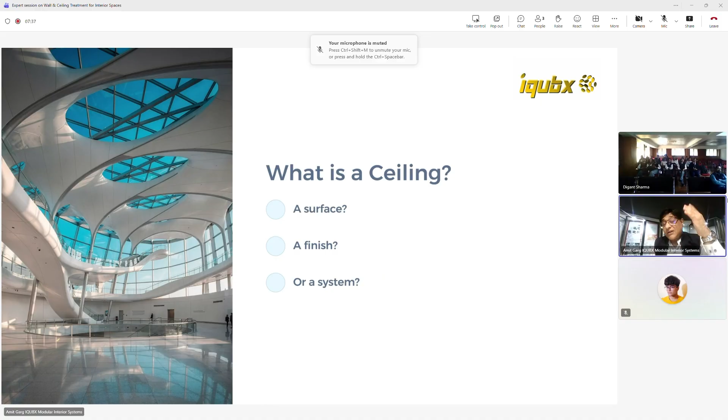Generally speaking, it is the soffit of a slab - the underside of a slab. So it is called the soffit of a slab. But in interior terms, it would be the secondary layer, which is suspended from the structural slab,

and performs different kinds of functions. And that is where interior designers become very important, because they have to really control and design that ceiling, which is in intimate touch with the space that is being occupied, right?

So as I was saying, ceiling is not decoration, it is infrastructure. You have a concrete slab, you have metal hangers. I would also like to encourage each one of you to really think out of the box, think in a different perspective.

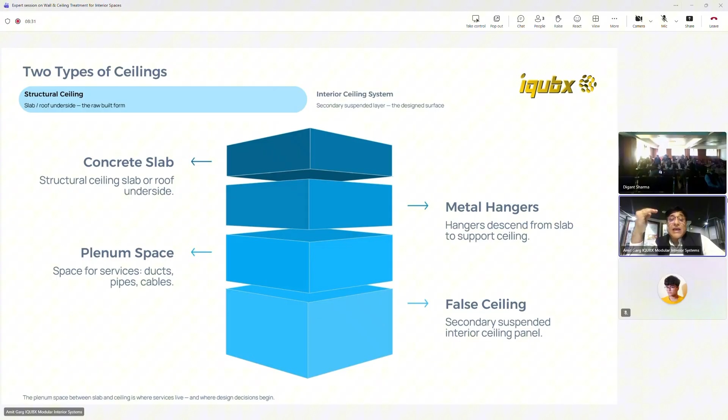You need a secondary surface hanging down from the main surface. So what would you do? You need hangers to suspend that. And then there is a plenum space, the space between the secondary surface, the false ceiling you've designed, and the concrete slab. There's a lot of services which go through that space. And then, of course, the false ceiling itself.

This is a bit dry, a bit of discourse, what we are talking about right now. But gradually it will become more interesting, as you will really find.

So why do we need a ceiling? The ceiling is there for space making, so that you can design and define a space. And then there's a performance aspect to it. Performance can be psychological, physiological, acoustic, thermal, fire performance, and other aspects, because in interior spaces, all the elements have a performance element attached to them.

It is defining and affecting your psychology, your perception, and it is service integration. Whatever services are going through, the ceiling has to interface with those services so they can become effective. And of course, maintenance - once the services exist in the plenum space, you need maintenance for that. Most people don't think about designing access to those services while designing a ceiling. Though you are students, you should become aware of this from day one, because that will define the kind of output you deliver as professionals.

The first thing I was talking about is visual dominance, the psychological layer. In most interior perspectives, the ceiling commands a visual real estate - when you look at a room, you're not even aware, but the ceiling, along with the floor, occupies a major part of the visual field, almost 30 to 40%. The walls, in comparison, are much lower. But as interior designers, we mostly focus on elements inside a room - partitions, walls, a bit of flooring - but we don't talk about the ceiling too much. That is the kind of focus I want to bring about in my talk today.

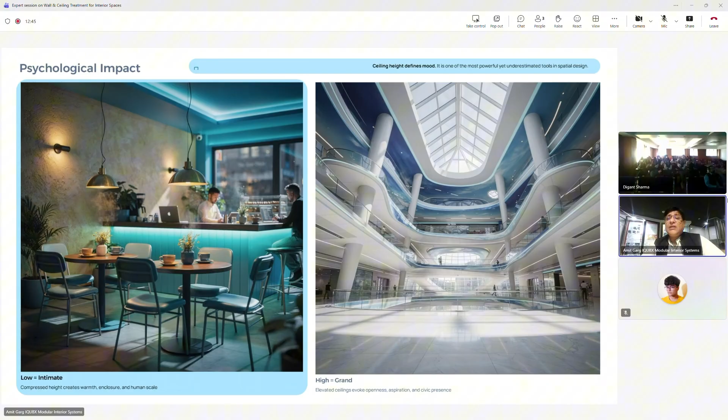For example, in this case, you can see that the image on the left has got a lower, or let us say a normal ceiling level, but on the right, as you will see in atriums of many malls and institutional buildings, in the entrance areas, a very lot of height is there. And that means grand, that means institutional, that means authority.

But it is definitely not intimate, because it is meant to intimidate or scale down the human presence, and says the space is big, the institution is big, the organization to which the space belongs is big. Or if you're talking about public spaces, it means you need to tone down the ego of the occupants, to say, look, you are an occupant of this space and you are not the master of this space.

While on the left, you will see it is more intimate. So people come here to enjoy, they have some intimate conversations, or they want to relax, which if you are sitting in the right space, I'm sure that is not going to happen. You are going to be awestruck. You are going to have a different kind of experience altogether. Not that you can't have a coffee sitting there.

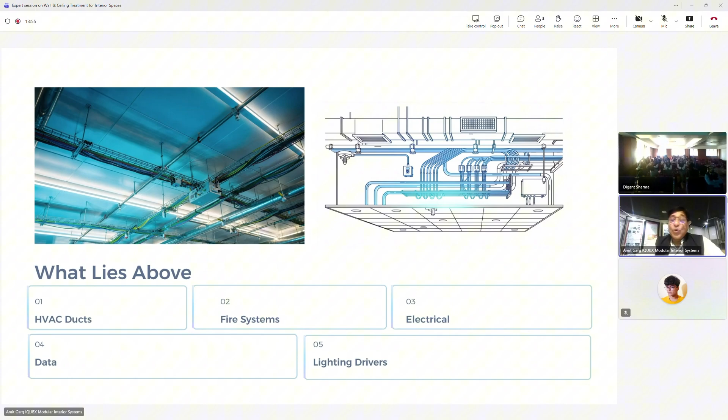And then there is the performance layer. So we were talking about services which go above the ceiling. Some of the things are written here already. But if someone would like to come over and say, what are the kind of services which go above the ceiling in the illustration, you can see some names are written there. Would you like to share something?

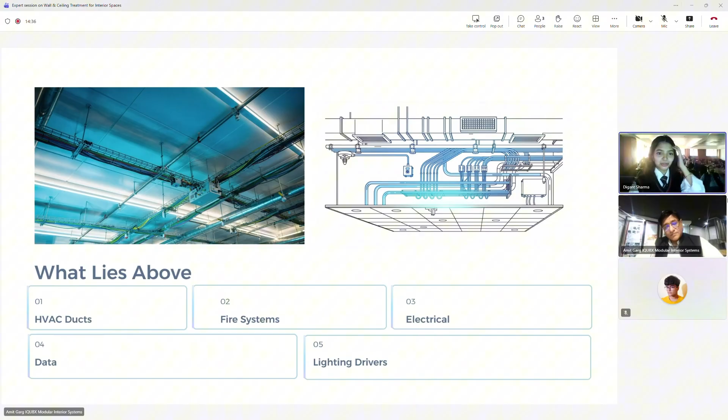So they can be electrical services, then AC, the air circulation ducts, and I can remember these two. So there are AC ducts, then there are AC machines themselves. Then there are a lot of sprinkler systems, firefighting systems, smoke detectors, firefighting systems with different kinds of pipes which will have valves that need control.

Above ceiling fire detection, smoke detectors will need access because they need to be reset. For the AC ducting, they may need some maintenance or repair. But of course, no one gives access to the AC ducts as such. If something happens to that, you have to break down the ceiling or dismantle it somehow. But the AC machines which need regular maintenance, you need access for that.

And the electrical of different types - there may be high voltage cable trays, or circuit wiring, or low voltage systems related to data and telephone, etc. And of course, the lighting wiring and the lighting drivers. You may be saying, what is a lighting driver? But you may know, or you may be on a higher semester, that modern day lighting requires LED lighting, which are low voltage systems needing drivers - electronic circuits to control the flow of electric current. And of course, plumbing.

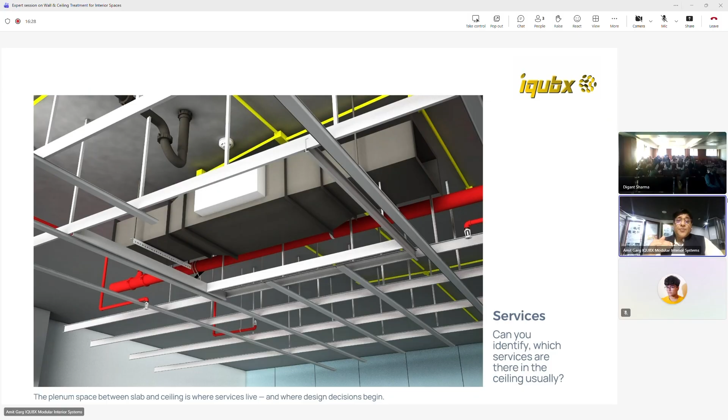So you see the plumbing pipe which is hanging down here. In many modern buildings, you will see the plumbing of the upper floor is hanging down, so there is no drop slab. Earlier, or in residential and many commercial buildings too, architects have different design sensibilities in what they really want to do. They may want to put the slab at a different level and hide the plumbing in that layer, but accessibility becomes a problem, and maintenance becomes a problem.

So plumbing is now hanging down in the floor below, and there you will need access if some maintenance is required, you can easily do that. And so many people are doing that.

So there are a lot of services going inside this ceiling, and of course it will be chaotic, because if you are exposing them, you need to lay them out beautifully. You have to color code them, you have to make them look aesthetic, which is a difficult and expensive thing. So many people say, why spend the money, let us not have a ceiling here. And I tell them, look, it is going to cost you double, and not many teams are efficient enough or good enough to create beautiful exposed, open ceilings. So ceilings do hide all these chaotic services which are going inside.

So when you look at the ceiling, you have to understand that the services are there. You need to access them, and it needs to be coordinated. It is written.

When you practice as interior designers and architects, you will realize that a lot of effort goes into coordinating the services. You will have consultants - an MEP consultant who's handling multiple things, or maybe the HVAC consultant is separate, the electrical consultant is separate, the plumbing consultant is a separate consultant, and then you will have a low voltage person, a lighting consultant.

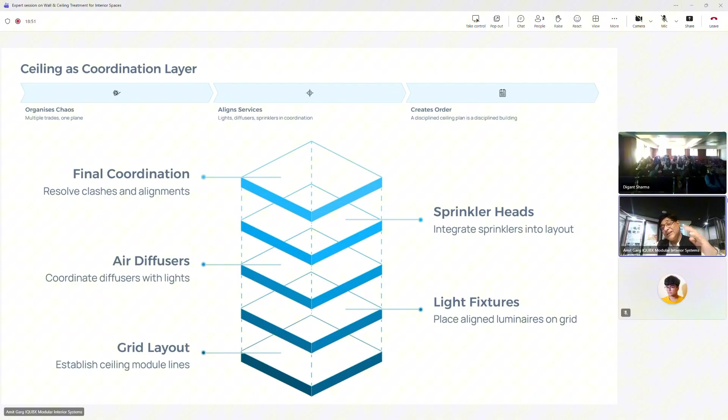So you need to coordinate all that, and you have to really understand how to ultimately design ceilings which are able to accommodate those services.

And as I was talking about, and I have been mentioning about the access - when you have so many services going inside the ceiling, you need access to it. If you cannot maintain it, you did not design it. So once you have the services, how do you access them? That is through ceiling trapdoors or ceiling access systems.

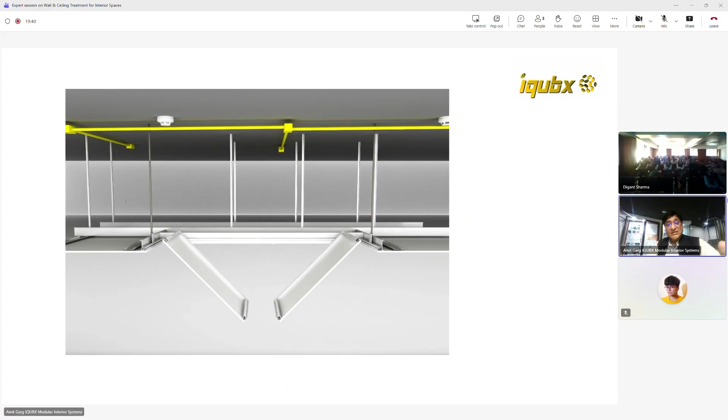Believe me, most of the services, most of the institutes, they are not teaching about this. Even if you go and practice outside with designers in offices, you will realize this is something that usually people do not talk about, or are not aware of, or do not have the expertise in. But you see, you could see how these trapdoors are there, and the doors can open, and you can access the services inside. That is one of the ways to handle access without breaking or dismantling the ceiling.

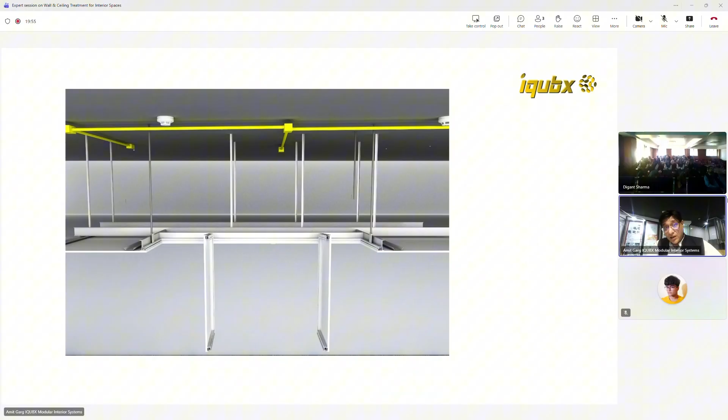And you will be surprised how often internationally people are not really addressing this issue, which we at IQUBX, and as a designer, I have handled. But we'll talk more about that later.

So we have been talking about, generally speaking, what the ceiling is - that it's an infrastructure system and not just an aesthetic element, and that there are a lot of services involved here. And of course, it is a performance layer, which we'll be talking about - because we are talking about acoustics here, thermal comfort, fire safety, air movement, and all that needs to be handled. Let us see if that slide comes up later. But otherwise, just be aware that this is a very important aspect.

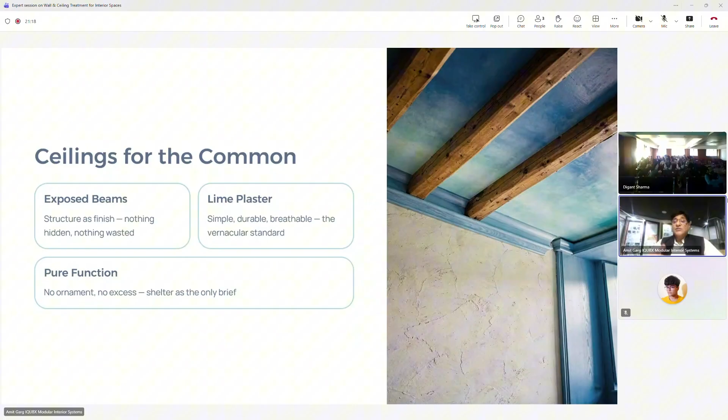So historically, let us go back in time - generally, society was divided into parts, the poor and the rich. I'm using a maybe politically incorrect, but simple segmentation of society. Ceilings for common people were like something like this - typically, across cultures, you have exposed beams, some lime plaster, and it's purely functional. Rather than functional, I would say it is structural, because there are no performance parameters, no services going inside, and no high aesthetic value needed.

It is not much of a statement which you want to make. The life was much simpler, politically and economically. What kind of statement would a common person like to make today? If you go to even a middle class ceiling that you're going to design in an interior, there's a statement attached to it - who that person is, what is the background, where is he coming from, what is his culture, where has he been in his life, has he been traveling - and the ceiling design can reflect that.

But in ancient ages, not much of that statement was there, and there was no desire to express oneself to that extent. But yes, it was different altogether when you're talking about powerful people, the rich people, or the religious institutions like the church, the temple, or the kings, or the nobility. There you saw different kinds of ceilings like coffers, domes, and a lot of murals which went onto the ceiling, with paintings and ornamentation.

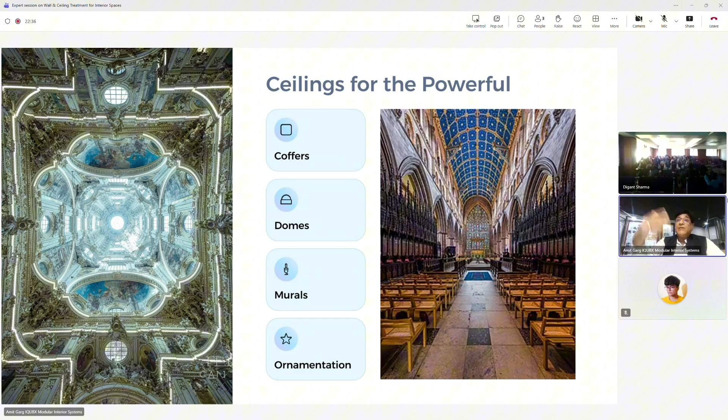The ceiling was power, it was identity, it was political. Ceilings told stories. There was a lot of emotion, and they began using the panels of the canvas to tell people about what needs to be said.

So if you see, there are a lot of sculptures in the temples, even on the ceilings, a lot of patterns which were tantras, which were yantras, which were religious patterns or cosmic patterns, or maybe paintings talking about that. In the Western culture, it was more of painting and less of sculpture, but in Indian culture, more prominence of sculptures was there and a bit less painting.

They talked about the stories associated with their religion, or whatever they wanted to convey. If it's a palace, you want to talk about the religious aspect, you need a sanctity to be a king, or you may want to talk about the campaigns you have won, you want to talk about power, whatever it is. So you see, ceilings told stories.

But then the industrial revolution came, and there was a lot of shifting, and a lot of services happened which were not there earlier altogether. We have talked about all of those services which went eventually from below the ceiling and from the walls and from the floor into the ceiling.

And what was the shift here? There was a different kind of ceiling system which happened, like gypsum ceilings and modular systems of different kinds, which allowed faster installation and allowed services to go through. But then there was a subtle shift which was happening.

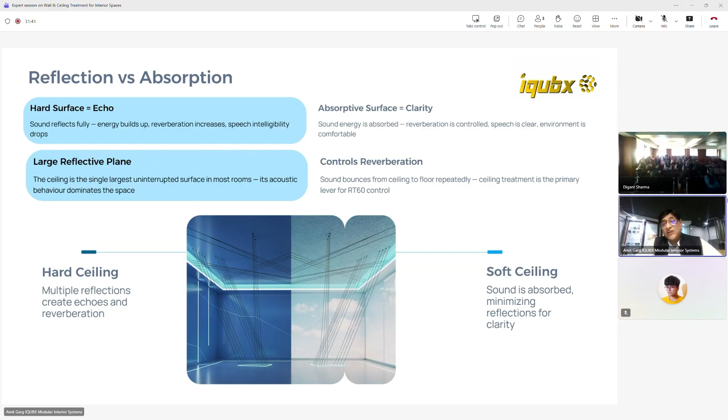Hard surfaces reflect sound, you can see it in the graphic a little bit, and absorb. When you absorb the sound, the echo, the noise, the sound is not reflected, and that controls the reverberation.

So hard ceilings are there, the soft ceilings are there. You have to be aware what kind of materials they are. You should understand a term in context of ceilings.

There's a term called NRC, and you should become very conversant with this term, because for any material that you use, the first question you should ask is, what is the NRC? How much sound is it reflecting? If NRC is 0, that means it is reflecting 100% of the sound. And if NRC is 1, it means perfect absorption, no sound is being reflected at all.

You need to balance it out, you need to balance it out. You don't want 0, you don't want 1, usually you don't want 1. Though you may sometimes want nearer to 1.

So mineral fiber tiles give you an NRC of 0.55 to 0.9, which is fair enough. PET boards or acoustic boards are made up of polyester or something, and they are again nearing 0.7, 0.8, 0.9. And gypsum board, as you can see, is 0.05 to 0.1, which is lower, meaning they are more hard.

So mineral fiber tiles is something you should go in for. There are a lot of other materials available, but mineral tiles have high sound absorption, they are cheaper, there are readily available systems. You go to a shop, pick it up, install it very easily, and they're cheap. That's why in many places you will see simple mineral tiles, maybe even in your own classrooms.

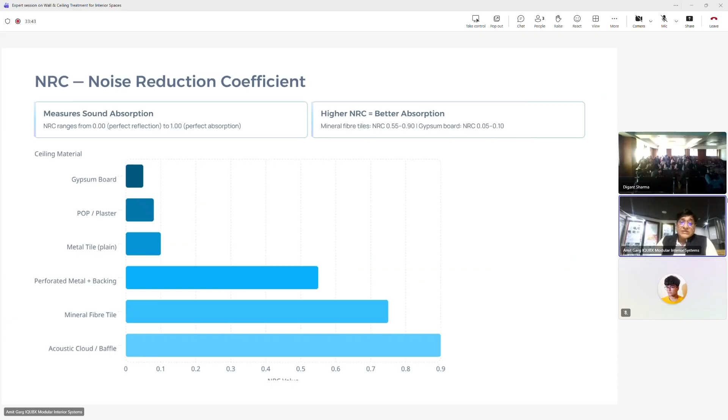You can see the graph below, which shows various kinds of materials like metal tiles, even POP, plaster, acoustic cloud. But you should be able to understand where you need to put which material and for what purpose.

One important thing no one is going to talk to you about, not in institutions, not in big architectural offices either, is above ceiling partition. If you put a complete wall or partition, the possibility of sound going from one room to another is very limited. But if it's not there, sound leakages happen, so whatever partitions or ceilings you put, the sound leakages will be there. You need to put up a plenum barrier or above ceiling partition so that the sound doesn't go above the ceiling, and that becomes a very important part of the ceiling design.

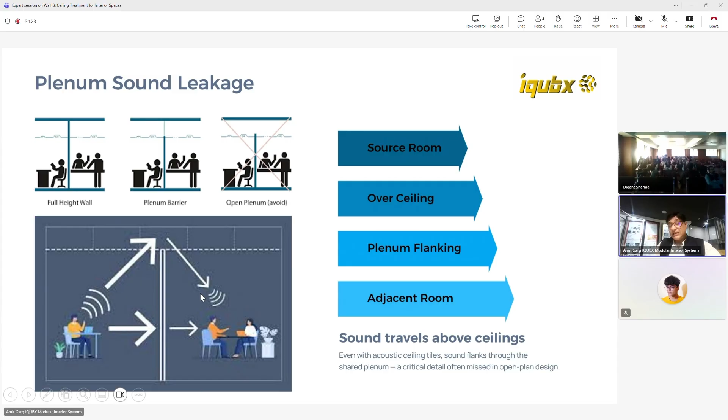Most of the big architects forget to do that, they don't plan it out properly. For HVAC, for high-end systems where maybe there's ductable kind of HVAC environments, you need to plan out how to isolate the air and how to isolate the sound.

That's again another chapter which needs to be discussed. But above ceiling partitions and above ceiling ventilation, cross ventilation ducts which absorb the sound while allowing the air to go through, because of sound absorbent internal surfaces, is something you should be aware of.

And now we come to the various kinds of ceiling systems.

You can start off with POP ceiling systems. How many of you understand what POP is? I think most of the people will have come across POP ceilings or gypsum ceilings because they are the most prevalent, common systems which are there in the market.

So in a POP ceiling, you have some hangers, you have a subframe, and then you put a jal, a wire mesh, a chicken wire mesh, and on that you apply the POP material mixed with water like a putty, and then you put some layers over that, and you can easily shape it.

So the beauty of this ceiling is it is very prevalent, so the labor is easily available. It is craft heavy, meaning you can create designs and patterns, and most of the available labor can do that. It is pretty long lasting; if you do it properly, you usually do not have cracks in it.

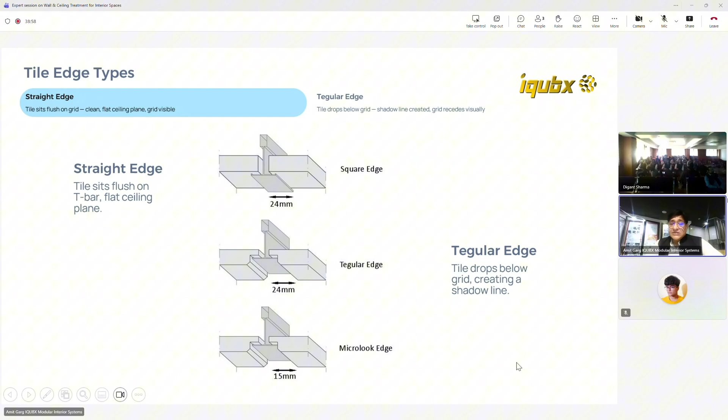Then you have a tegular edge, when the edges are chamfered, or a rebate is there, so the tegular edge can hang down and create much better aesthetics. When this gap here becomes small, it is called a Microlook, and this is terminology you will come across commercially a lot.

This applies to mineral tiles as well as gypsum tiles. In mineral tiles, as I said, the NRC is very high, and it's very easy to remove the tile — you can just remove any tile and access the services above.

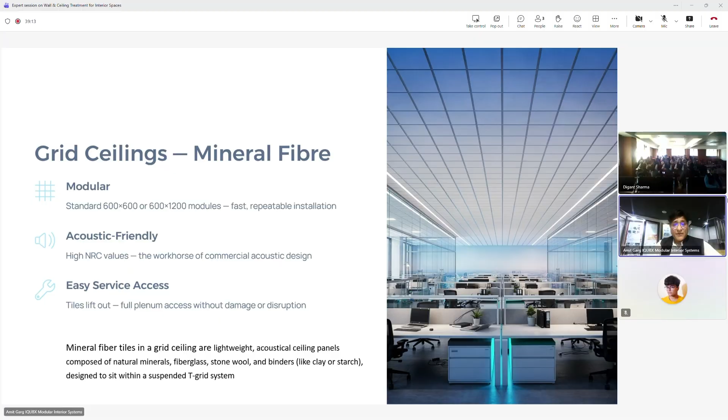So again, it is one of the most prevalent systems out there. Instead of mineral tiles, many people have started using gypsum tiles, which are reinforced gypsum tiles, much stronger and sturdier, and they can be perforated. But because of the hard surface, it will have high reflection and low NRC value, though it can have perforations. Perforation is one of the ways to control sound, because when perforation is there, what will happen?

So the sound waves will get absorbed, in the sense that they will go through these holes, get absorbed a little because of the porous surface, and then go above the ceiling. And so below you will have some sound insulation, some echo control, which is getting possible.

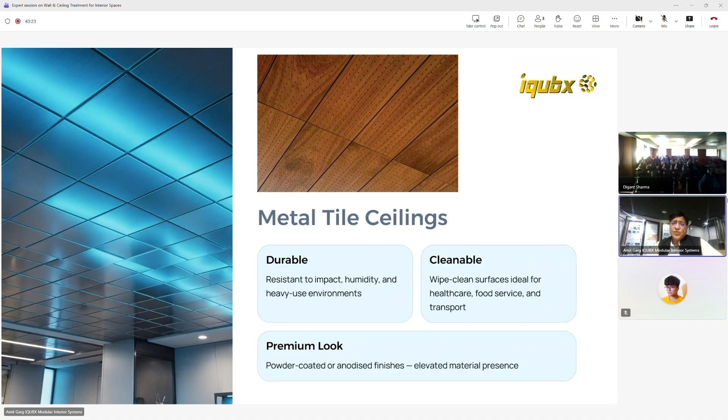Similarly, there are metal tiles which are again put in a similar kind of grid system, but as you can see, there are some perforations here. So various finishes are possible. I deliberately put a wooden finish tile here to make you understand that these days powder coating can easily be done on metal surfaces also, to emulate different finishes like wood. It's very easy to clean and maintain, durable, medium costing, easy to install, and has a very premium look. This is the kind of ceiling which many people have been doing.

So I was talking about perforations. In this perforation, this is another kind of perforation ceiling.

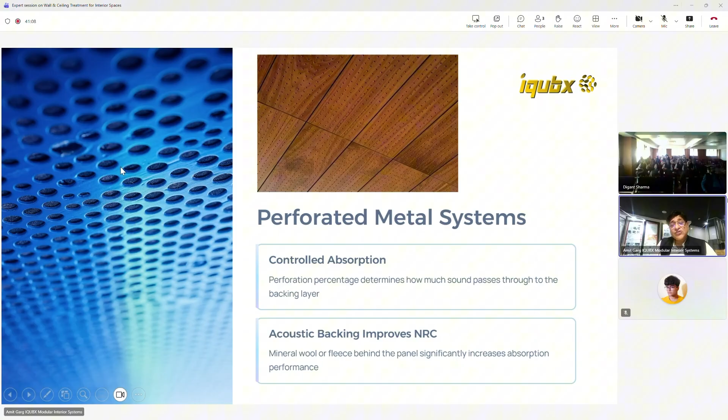And as you can see, there is a back layer here, and this back layer is the absorbent layer. So in this kind of thing, see, the perforation in the gypsum ceiling, the reinforced gypsum tile, was different, and this is a different perforation. This is just a hole. It is not going to absorb anything, and it is also going to substantially allow the sound which went above the ceiling to come back through also, because there is no depth. It is just 1 mm kind of thickness of these things, because once you start doing that, this will become a part of the specifications.

Many times, low-cost materials will have perforations, and they won't have an absorbent layer behind it.

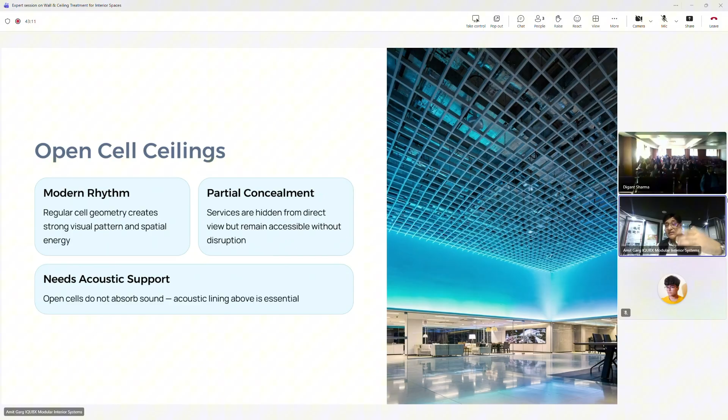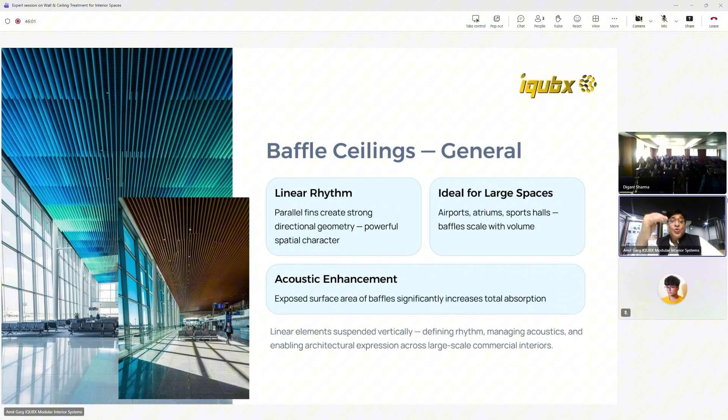But besides a lot of aesthetic value, these can have acoustic value. Usually they are made of GI and aluminum, which has zero NRC. But because it can allow some sound to pass through and capture a little bit that hits the ceiling, or you can put some absorbent surface touching the soffit of the slab, you can have some acoustic value here. Or you can make the baffle ceiling out of acoustic material itself.

So these were the basic ceiling types. Now, as I have been talking about, one aspect I would like to say is ceilings are usually static. Ceilings do not change. People design them once, and it stays the same, maybe with a little color change. Why is that? I like to say change is the only constant, and we are changing too fast.

In the time of artificial intelligence, the world is actually changing overnight.

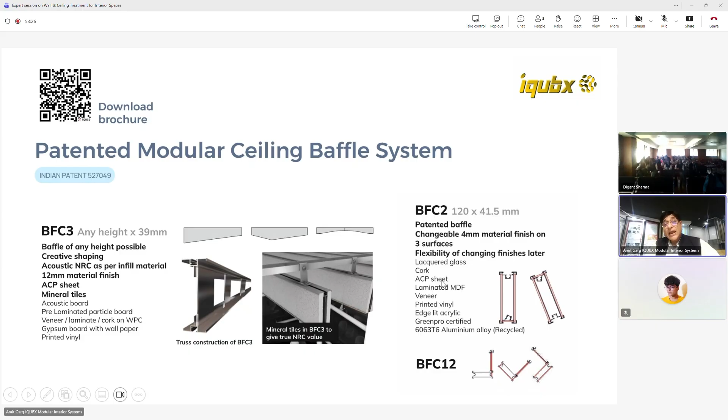On the right side is a patented system in which you can insert any 4mm material into this box section all around, including lighting, cork, lacquered glass, and veneer. This kind of system is patented; no one in the world is doing that, and it can be very liberating for designers. They can design different kinds of systems.

These are the different kinds of materials which can be embedded. People have used fabric, printed vinyl, and these are changeable finishes. They are inserted and you can change them, which makes them dynamic ceilings that can be changed and reconfigured later also.

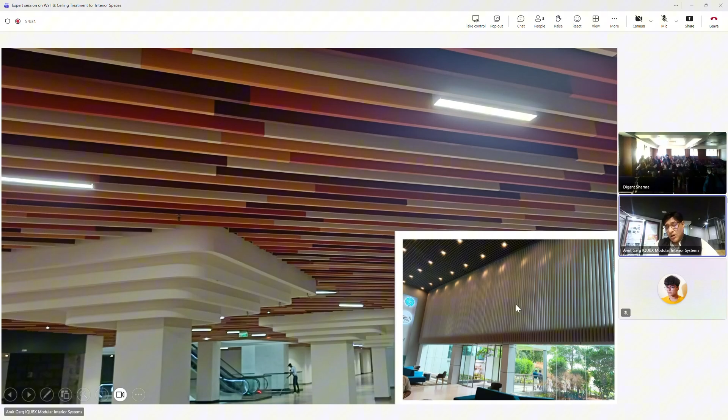I was talking about how designers use different shades of blue in the same space, and this is in Sector 18, Noida, Delhi NCR, at a mall called Wave One Mall. The entire third floor area, which is a food court, has used our baffle ceiling system in multicolor, and below you can see the baffles used vertically. This is for a pharmaceutical company near Hyderabad, and this is Tech Mahindra and Mahindra University in Hyderabad, which again used our baffle system with alternating colors.

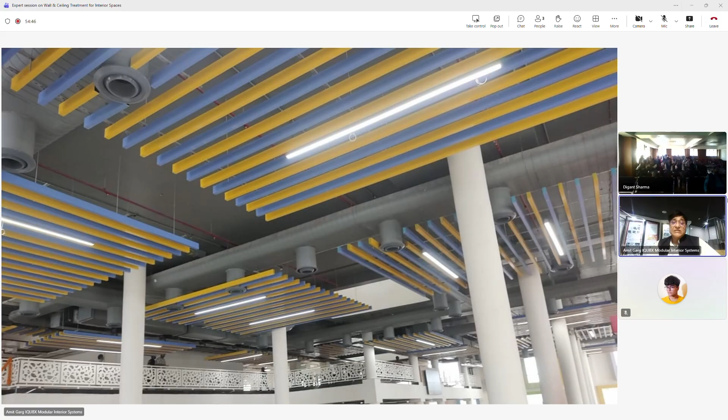One thing I want to share about the access problem—we've been talking about ceiling access, which is called the ceiling trap door. Usually on the upper side you see broken-looking stuff; people make it from wood, or do something with gypsum tile, or in grid ceilings they remove the middle tile to access it, but this is not the right way of doing things. It gets misaligned, cracks appear, and it causes visual destruction—it actually spoils the entire environment and aesthetics of the space.

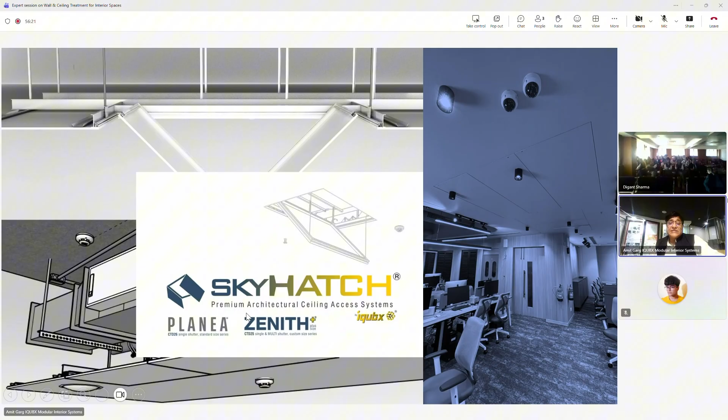We have launched Sky Hatch. Until now, our ceiling access system was available under iqubx, which is our brand name. Now we are about to launch Sky Hatch as a separate brand name for our ceiling access systems, which will come in Planea and Zenith Plus 2 series. The Planea is a small size, 300 by 300mm—that's 1 foot by 1 foot—and also comes in 450 and 600mm fixed, standardized sizes available worldwide. But ours is better because it has safety features and other things built in.

Then there's something no one else in the world has—the large format precision access ceiling system, called multi-shutters. As you can see in this snap, there are multi-shutters which can open up and all slide to one or two sides, giving you a complete big opening. We are making huge ceiling trapdoors now, which are being shipped across the country and used in airports, universities, residential apartments, hospitals, hotels, and virtually any kind of interiors.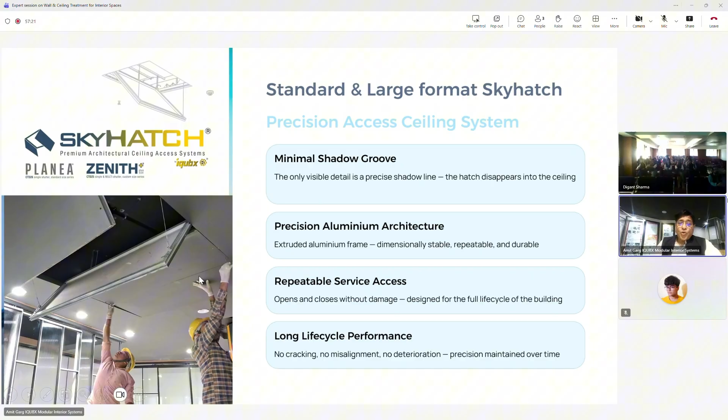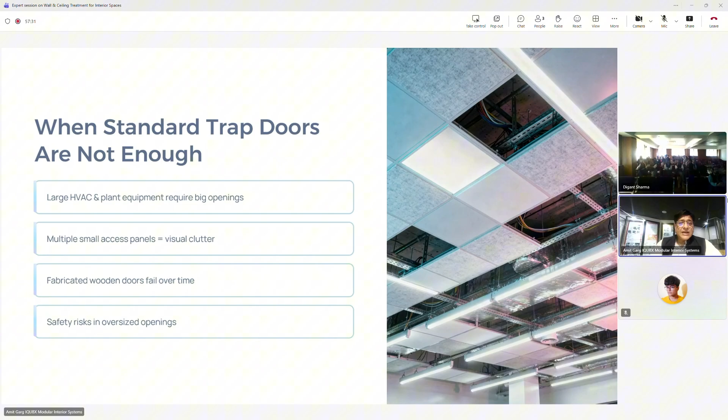And the beauty is you just see a groove around all the shutters, so it's very simple and nice to look at also. So this is the large format precision access system. You can see there are 3 shutters here, and even from the size you will be able to guess.

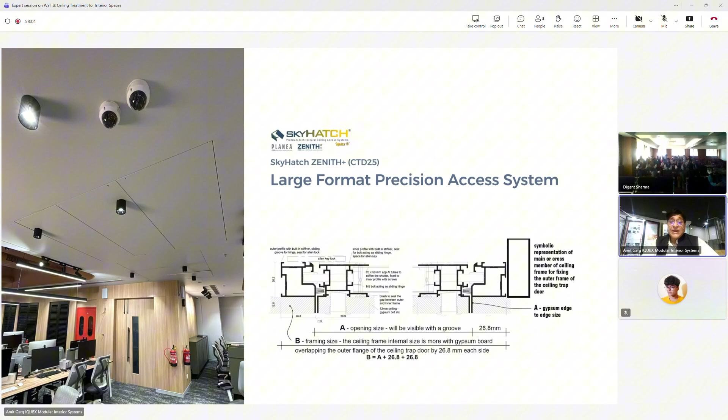And once you become more conversant with the kind of systems which are available in the country or outside the country, you will realize what kind of intricate systems we have been designing.

Even we can have single as well as multiple shutters here. 18 feet by 8 feet is the biggest we have made so far. It has got a very innovative sliding hinge which is also a safety mechanism, and which is very easy to operate.

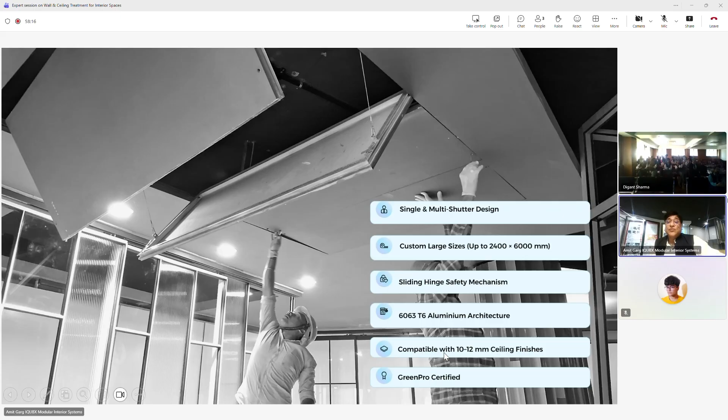And of course it is Green Pro certified. I will share this presentation with you all, so you can go through it a bit later. It's got all the features here, which are again something unheard of anywhere. You can search it on the net or in the market. You won't have seen such kind of features in any of the access ceilings.

When talking about accesses, that is one of the areas which is getting ignored most, so you should be aware of it more. As I was saying, they are all Green Pro certified. We have the largest portfolio of Green Pro certified architectural systems in the country.

And this is the final thought I would like to close upon: ultimately, ceiling is not a surface, it is intent - what you want to do with it, what is the purpose. And it is a lot of engineering, how you want to engineer, what material to use.

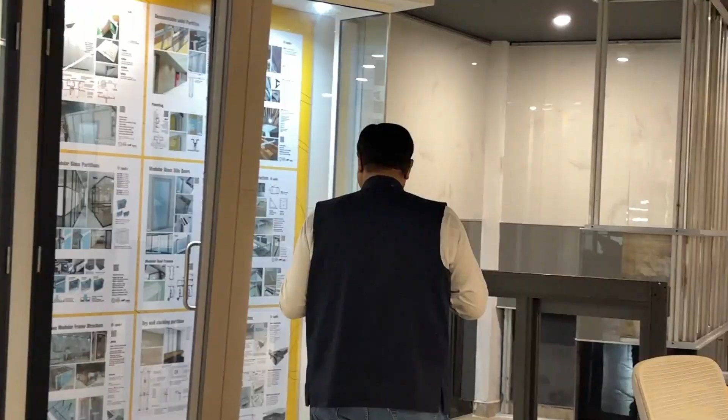If you can see in the ceiling, these are the smaller sizes. And this is a bit bigger size that we have put up. Behind you can see, this is I think 12 feet by 5 feet, and it's got 5 to 6 shutters, I think.

And so this is an open ceiling kind of layout which we have here. They've got a cassette AC and these are the baffles. The different kinds of baffles are there. I mean, those are also baffles.

And these are more of a box section in multicolors and finishes. They have been used differently, I mean, it is not a continuous layout, so you can see and appreciate these - another patent baffle ceilings which I was talking to you about.

In which you can embed light in different materials. You can have cork and laminate and glass, and you can take some patterns out of it. And so, more or less.

But yes, okay, yeah. So let's hit the questions first then, I think.

Good afternoon, sir. Good afternoon. Sir, I am from B Design, Interior Design, second year.

And my question is, we talked about sustainable materials. I wanted to ask how easily are they available in the market? And what is the cost difference when we compare it to the usual products that we use in the ceiling? Very interesting question. So I've been, I can say that I've been leading thoughts on many topics.

This is a subject of my thought leadership when I'm talking about sustainability. Sustainability needs to be mainstream, it needs to be common, it should be affordable, easily available, and easily doable. Once that happens, sustainability becomes truly sustainable because then no extra effort is required. If it is expensive, fewer people will use it, and the entire effort of making a sustainable material will go to waste because the environment won't be impacted if only a few people are doing it. So sustainability needs to be sustainable itself. I'd encourage you to go through some of my material on sustainability and sustainable materials.

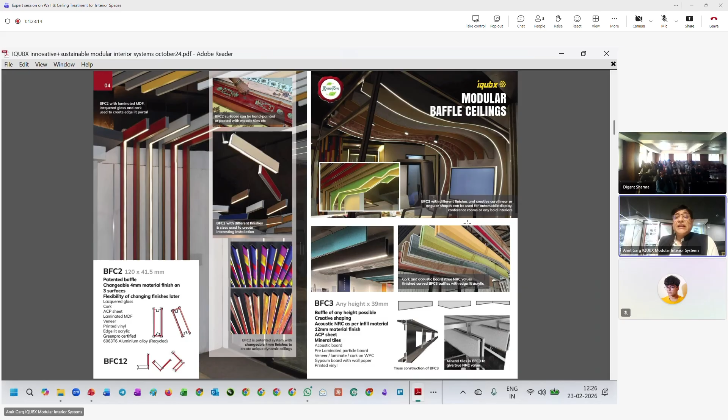They can even be hand painted. And here you can see how they have been shaped in different kinds of materials—different kinds of shaping can be done, sizing can be done.

This is the same interior I was talking to you about in Wave 1 Noida, showing how multicolor effects can be achieved. You can see the kind of effect it is giving you. Then it can come in multicolor, wooden finishes.

We can convert any size of rectangular tube available in the market, a generic tube, into a baffle. This is a liberating factor, because many people want 200mm by 100mm, some want 200mm by 50mm, someone wants 250mm. Usually, commercially it is unviable to design, manufacture, and stock different sizes of rectangular box section baffles.

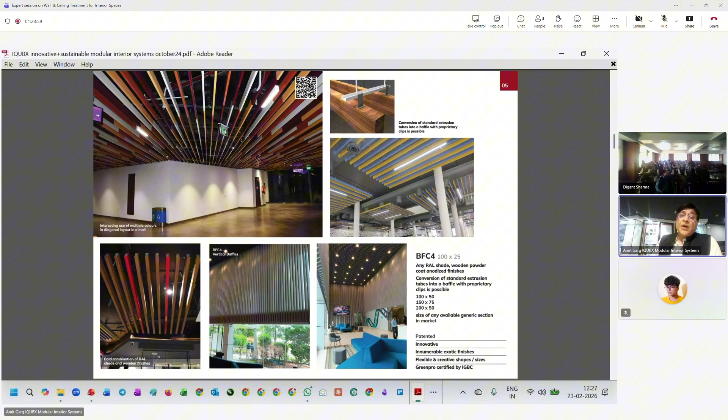So what we have done is: any tube that is generically available in the market, we can convert into a baffle. After that comes the ceiling tableau that you were talking about, and this is the visual you also saw in the presentation, showing how different services run through there.

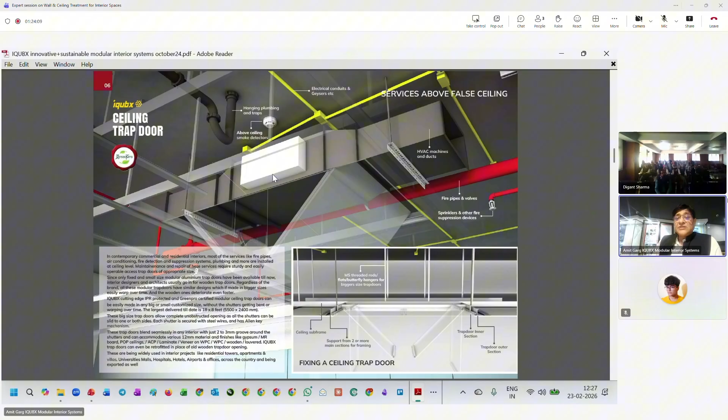And this is the plenum, and now I would like to draw your attention to this section here.

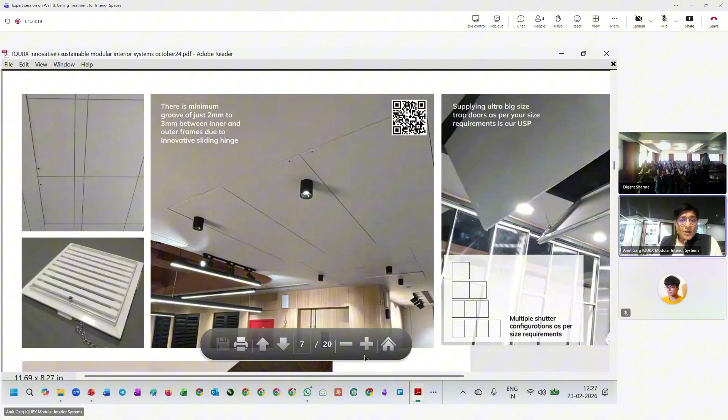So if the section is visible here... yes, here it is. The section is visible, but it's not very sharp because of low resolution. So you see, this is the outer profile, this is the inner profile, and there is a bolt here which goes from the inner profile of the shutter. This is the inner shutter profile.

So what happens here? There's a frame system, the outer frame and the inner frame. The outer frame is fixed to the ceiling, and the inner frame is fixed to the outer frame, so it becomes a shutter, like a door. This is based on a bolt hinge which goes from the inner section to the outer, and it can slide.

So what happens when there is a groove, and you try to open it? Now look at this, this gypsum board is fitted below. So when you open it, I can take out an AutoCAD drawing and show it to you in section. So this becomes your hinge.

Suppose you're opening it in this direction, then when it becomes a hinge, there is not enough space, there is just a 2 mm gap. How will it open then? It won't, right? For that, as it opens, you start sliding it out, and it becomes easy to open, leaving a minimal gap of approximately 2 mm. So that is the innovative hinge, the sliding hinge.

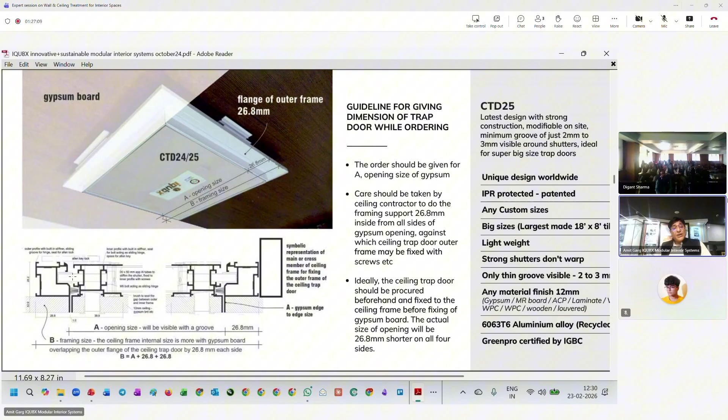But even then, they will use ours because there is no other solution in the market. Although we are trying to expand our footprint and make it feasible, now we have manufacturing bases in different cities and different regions.

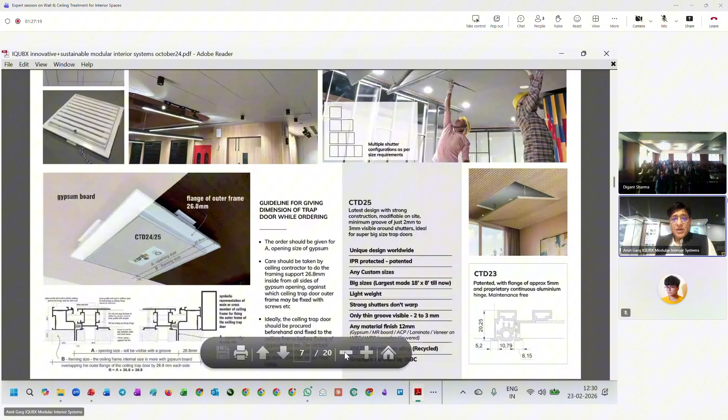But this was just an example to show that you can even have different finishes here. As you can see, wooden finishes are possible, laminate finish - if we look at the top left, that can be laminate finish, louvers can also be done. So it is quite flexible that way.

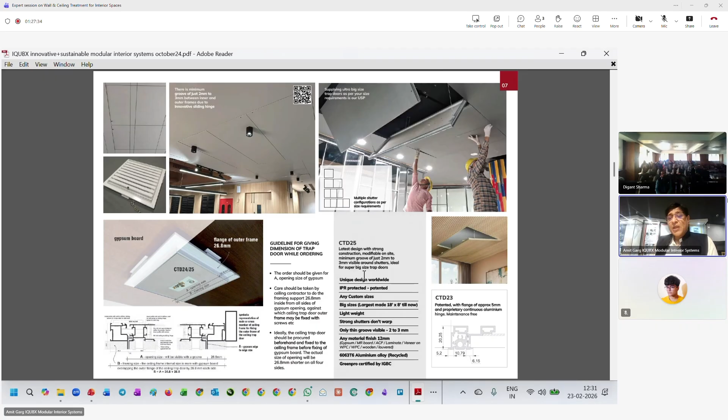Then in partition systems, we usually don't talk about NRC here because it is not about reflecting the sound back, although that is an important factor too, but it is more about how much sound goes across, because you divide the spaces into different partitions to isolate those spaces for working, for functionality, though you may want visual continuity.

Sometimes you put up a masonry wall, sometimes solid partitions, sometimes glass partitions there, so sound insulation becomes important because of what is happening in one room - for example, you are sitting in a classroom and there's another classroom adjacent to you.

If too much sound leaks through, you won't be able to function. Similarly, in different rooms of a home or office, if you're sitting inside a cabin working, you want privacy, confidentiality, and you don't want outside disturbance. So sound insulation is becoming very important, and it is measured in STC.

Usually in the market, you will find people talking about STC 30, STC 40. People don't talk about STC 40 plus. Our minimum system is STC 40 plus, and we have designed a system which is STC 54.

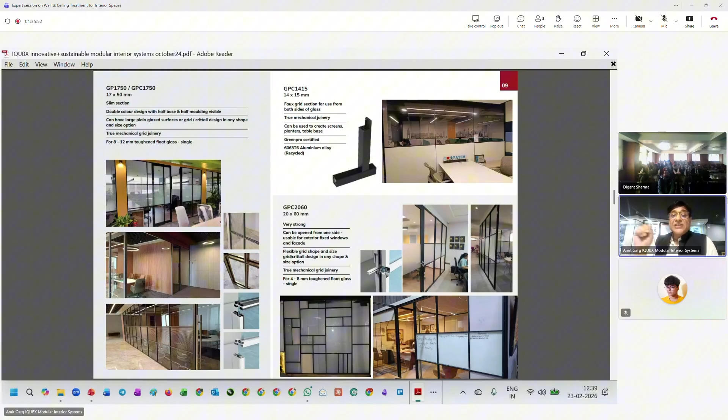You will see a lot of people want grids, and they have been prevalent since ages. But how do people install them - they stick them onto the glass. I'm sure if you get hold of a glass vendor or partition vendor in your city, you will find that people make them by sticking. The whole globe does it this way. We have made systems with proper mechanical jointery in which each glass is a separate glass.

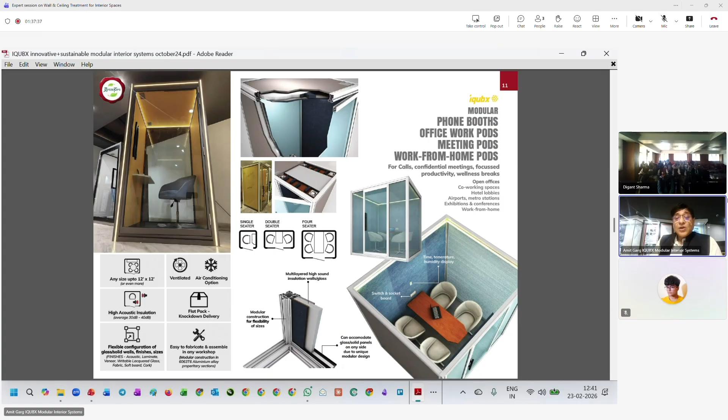completely modular, self-contained, and highly acoustic insulated, ventilated pods, which you can design according to your needs. There's flexibility in that too, and work from home pods. So we have launched work from home pods. The way of living is changing, the culture is changing. Today even in small towns, in urban environments, many people in the household are either working or studying, and they need acoustic privacy, isolation, confidentiality so that they can work. Even at home, whether or not you do work from home, there's always a time when you need to work. Work from home pods are there in which you can organize, keep your stuff, bags and books and everything, and study without disturbing others and without getting disturbed by others. I'll share more details about these things with you too.

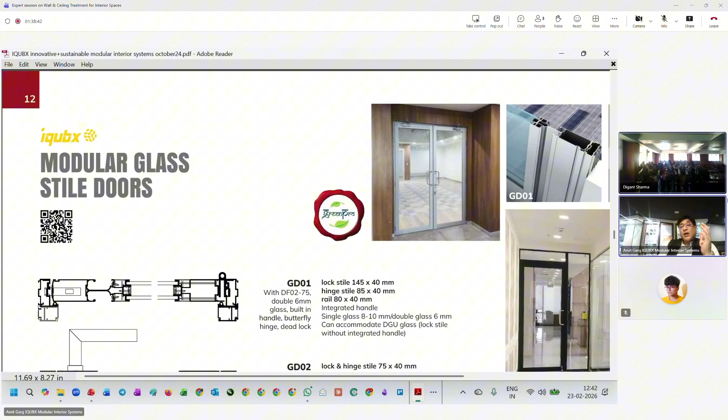अगेन इट इज गॉट डबल रबर सील फॉर हायर अकूस्टिक परफॉर्मेंस। आप हमारी चौखट को पुराने चौखट के टाइप से कंपेयर करें तो, अभी मार्केट में जाएंगे तो मालूम चलेगा कि ज़्यादातर जो मॉडुलर सिस्टम्स हैं उसके अंदर कस के वो दीवारों पे एंड पार्टीशंस पे चौखट लगा देते हैं, क्योंकि उसका फंक्शन होता है बस दरवाजे को रोकना, दरवाजे को सील करना। हमारी प्रॉपर चौखट पुराने ज़माने के तरीके से बना करके आप लगा सकते हैं।

यू कैन यूज़ इट इन मेसनरी वॉल्स, यू कैन यूज़ इट इन सॉलिड पार्टीशंस एंड ग्लास पार्टीशंस। एक ही तरीके का सिस्टम, जो मैं इंटीग्रेटेड की पहले बात कर रहा था, यू कैन यूज़ इट, एंड यू कैन हैव एनी साइज़ ऑफ इट एज वेल।

A lot of flexibility and a lot of creativity is also possible, क्योंकि जब आप ऐसा डोर फ्रेम बना रहे होते हैं which is like this one is 100 mm, तो आप बीच वाले को या किसी को या इस वाले को वुडन फिनिश दे दिए, इसको लाल कलर कर दिया, इसको काला, you can play around.

And इन डोर्स के अंदर you can have double glass, single glass, DGU, आप इसमें डाल सकते हैं something called drop seal। तो क्या होता है जब डोर खुलता है तो नीचे डोर के नीचे कहीं थोड़ी सी गैप रह जाती है, तो उसके अंदर ड्रॉप सील फिट हो सकता है टू सील इट ऑफ, सो दैट द साउंड एज वेल एज डस्ट इट डजंट कम इन।

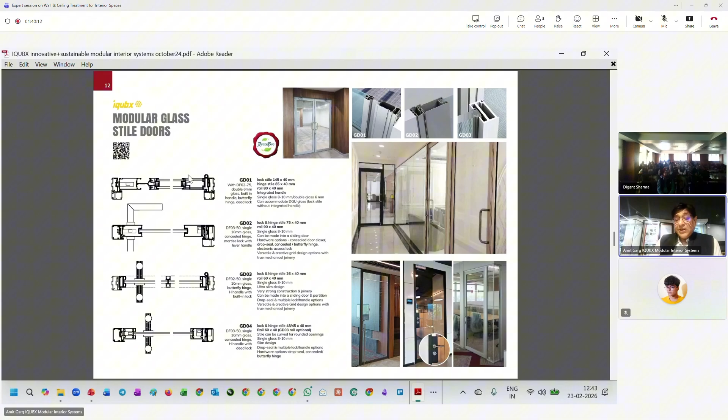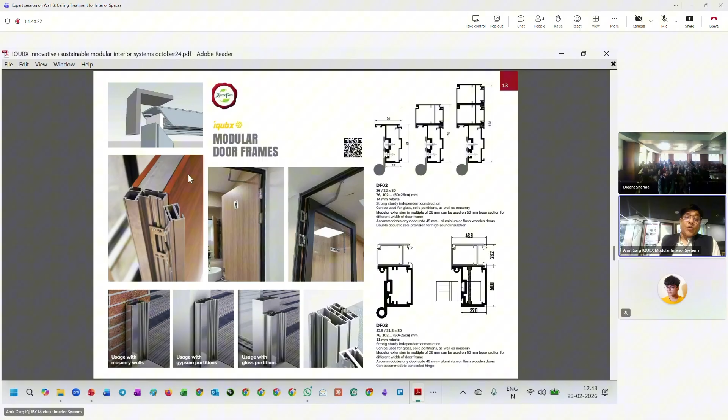फिर इसके डिफरेंट काइंड ऑफ हार्डवेयर इज देयर, यू नो, which can be used in different sizes, from aesthetic point of view, from strength point of view, different kind of functionality may be there। People may want कि इसके ऊपर मेरे को इलेक्ट्रॉनिक लॉक यूज करना है, कुछ करना है, सो वी हैव इवॉल्व्ड सिस्टम इन विच ऑल दिस इज पॉसिबल।

ये सॉलिड पार्टीशंस हैं, वेरी इंटरेस्टिंग स्टफ, वेरी कटिंग एज स्टफ। अभी आज की तारीख में कभी आप बोलते होंगे कि मैं केबिन में बैठे हैं, यहाँ पे हमको एक इलेक्ट्रिकल पॉइंट चाहिए, घर पे भी ऑफिस में भी कभी भी कोई, तो यू कैन डू इट। तो अभी आप क्या करते हो, तो उसको तोड़ना पड़ेगा, काटना पड़ेगा, तो आप यहाँ पे केसिंग कैपिंग करके ऊपर से पट्टियां लगा के ले आते हैं। आई एम श्योर आपके स्टूडियो में कहीं ना कहीं हो रखा होगा, इट इज लाइक दैट, बड़े ऑफिस में भी मिल जाएगा, घर पे मिल जाएगा।

केसिंग कैपिंग करके लेके आते हैं और उसके अंदर फिर ऊपर से सरफेस पे इलेक्ट्रिक बॉक्स लगा देते हैं, समथिंग लाइक दैट। हमारे सिस्टम्स में क्या है कि इसके अंदर एक कॉन्टिन्यूस कैविटी रहती है, जब मर्जी पैनल को टेम्परेरिली फिक्स विद हुक्स, आपको पैनल को हटाइए, अंदर से कहीं से भी वायरिंग को खींचिए, पैनल के अंदर कटिंग करके स्विच बोर्ड बिठा करके 1-2 घंटे के अंदर आपका काम खत्म।

एंड इफ यू वांट टू, अभी साहब बोलते हैं कि मेरे को यहाँ पे वाइट बोर्ड चाहिए या सॉफ्ट बोर्ड चाहिए, इन आवर सिस्टम्स इट इज वेरी इजी टू डू, एंड इट हैज बीन यूज्ड इन लॉट ऑफ, जैसे जेनपैक्ट के हर प्रोजेक्ट के अंदर स्पेसिफाई हो गया है। It is used in Prime Minister of Nepal's office. It is used in a lot of big institutions.

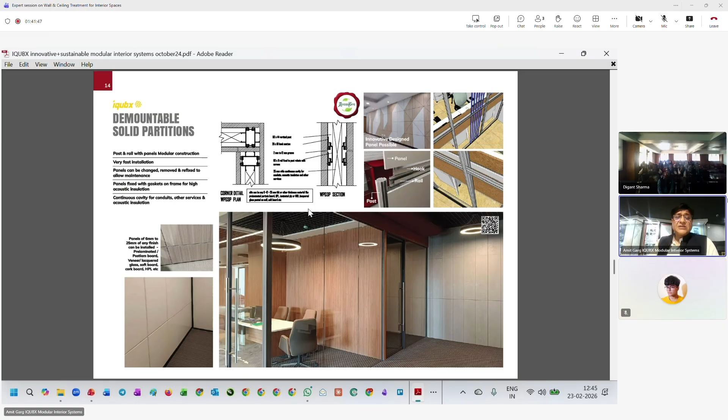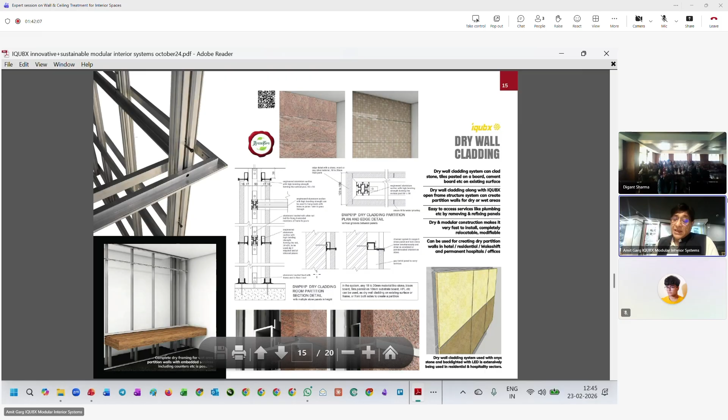We have got completely prefabricated kind of modular systems for wet areas like toilet pantries। आप prefab कर सकते हैं, बना सकते हैं modular, जिसमें stone and tiles can be embedded। And आपको मान लीजिए टॉयलेट के अंदर की प्लम्बिंग रिपेयर करनी है, तो आपने स्टोन हटाया और प्लम्बिंग को रिपेयर किया, वापस लगा दिया, that kind of thing can be there। And so completely demountable modular stuff.

इंडस्ट्रियल शेड के अंदर आप फ्री स्टैंडिंग केबिन्स और ऑफिस बना सकते हैं, जहाँ पे बहुत हाई सीलिंग्स होती हैं, और देयर इज नो सरफेस इन विच यू कैन टेक सपोर्ट ऑफ, तो कम्प्लीटली फ्री स्टैंडिंग है।

ये GMR हैदराबाद एयरपोर्ट का विजुअल है, जिसके अंदर 80 फीट बाई 20 फीट बड़ा पार्टीशन ऑपरेशनल वर्किंग एयरपोर्ट के अंदर हमने 1 महीने के अंदर करके दिया था बिकॉज ऑफ द मॉड्यूलैरिटी।

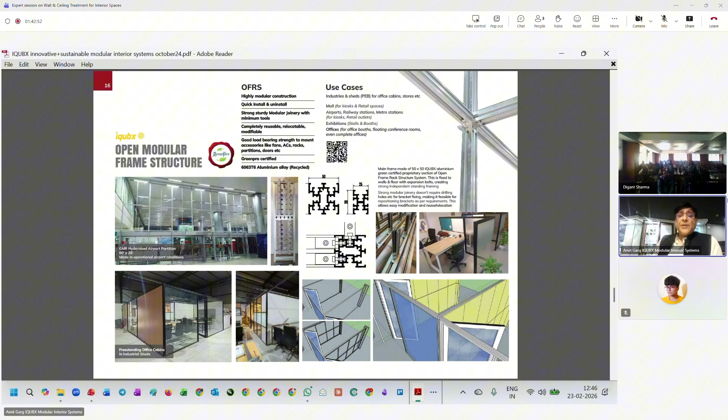ये एक सिस्टम है जो हमने सीमेंस के लिए बनाया था फॉर रनिंग मेट्रोस ऑल दिल्ली के अंदर, NCR के अंदर और बहुत जगह पे मेट्रोज जो रन करती हैं उनको इक्विपमेंट माउंटिंग के लिए भी हम सिस्टम बना के दिए थे इन्हें। वर्क स्टेशन अंडर स्ट्रक्चर्स हैं।

Everything is green certified. Everything is completely aluminium. Different kind of shapes you can do. Different kind of finishes you can do. Very interesting stuff. You can play around with them. You can be creative with them.

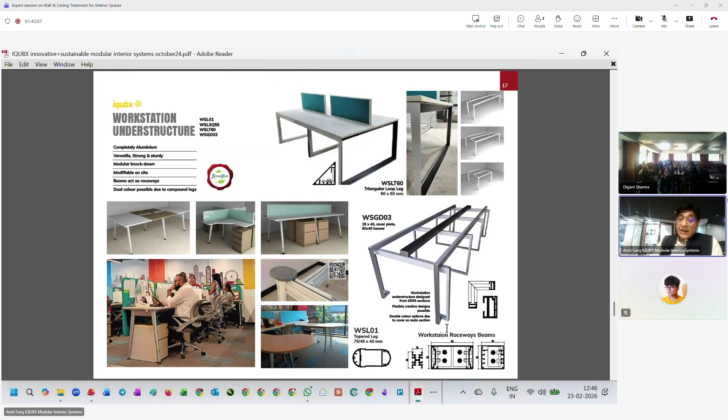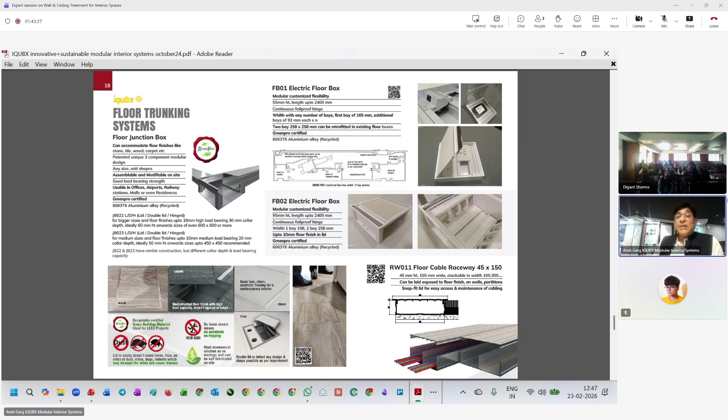And these kind of stuff. Then we got some paneling systems. आप पेनलिंग के बारे में भी जानना चाहते थे, but I think I'm a little tired now, to explain paneling today.

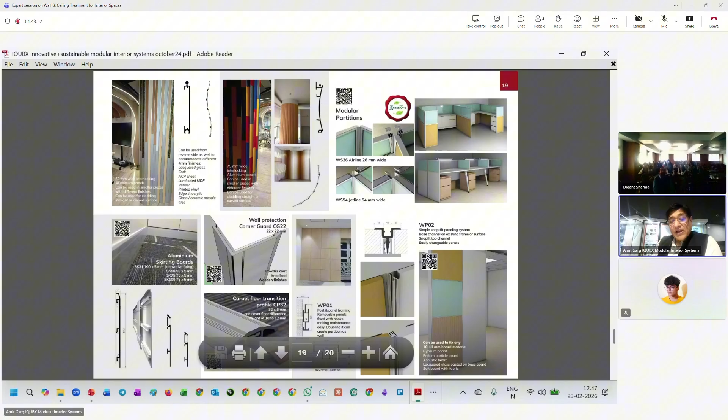Hey, so we have a separate session on partitions and paneling, sir. We'll do it short. If you can do that, it would be lovely. And they can cover corner guard, skirtings and transition profiles. मैं ये प्रोफाइल आपको शेयर कर दूँगा, so that आप लोगों को ये useful लगे, because the more you learn, the more you grow, the more you get freedom to do what you want to do.

You become a better designer. That is the intention, go in depth into things. That is the kind of attitude you should inculcate in yourself. So I must say thank you, Sharma ji, for this opportunity to share a few things.

It was our pleasure, sir, listening to you with such experience and technical know-how of things, and getting them to that level where it's not just a kind of solution, but a very rationalized solution for so many different problems, integrating so many things together. It was really nice getting to know about you and your company and the efforts the team is making. That pushes us to request you to take one more session specifically on partitions and panelings.